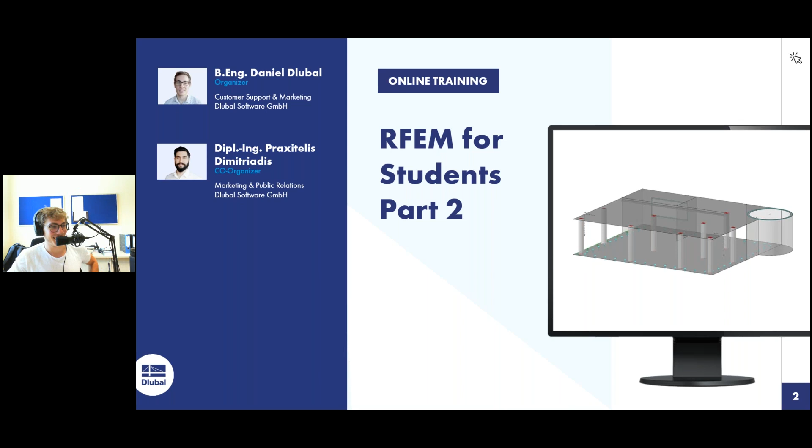Thank you, Praxitelis. Okay, let's go ahead. So for those who are visiting this training for the first time, here are some hints. We are using the webinar platform GoToWebinar. The control panel you see on the right side, there you have several options. First of all, you can show or hide your control panel in order to see more of your window, in order to see more of the training.

Then, of course, here you have the raise hand symbol. So if you have questions or something like that, you can raise up your hand and Praxitelis will answer this question to you. Of course, here also in the question box, enter questions for us, so that we can answer them. And if you don't hear us, here you can adjust your audio settings. And so for those who are attending now, please raise up your hands in order to see if it works. Click this button here. Very fine. Good. So I pull your hands down again.

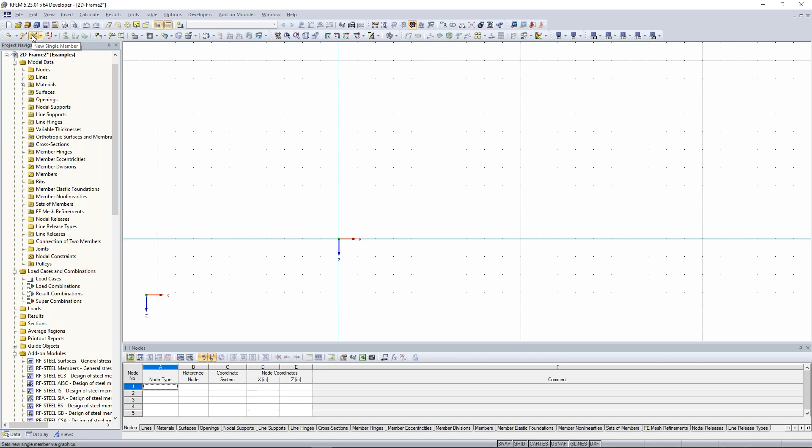First of all, I create my column. In order to create columns, you have to insert members. So I click here in the symbol bar, new single member. And because we haven't created one member yet, we have to create it. So I click here, create new cross section for member start. And it's useful to use this most commonly used cross-section at that window.

And we have to choose HEA profile. So in this case, this one. We click on that and choose here HEA profile 180. We choose the right material. In this case, not S355. We want to have this in 235. So I have to modify this material. I think the best way to do that is modify it, because then we can use it the whole time.

So click here, edit material. Open here the material library. And choose here steel S235. It doesn't have to be at the standard group German. It can also be at the Eurocode. It has the same values, the same material properties. Doesn't make a difference. So choose here steel S235.

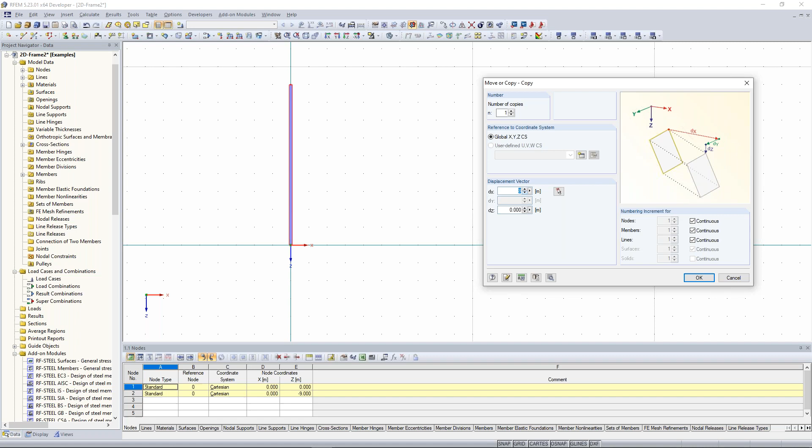So I select this column here, right click, say move and copy, and the number of copies I set to at least one in order to copy that. And my displacement vector is 8 meters. No, sorry, 9 meters. Oh, 8 meters, sorry, now it's right. Okay. Now I have two columns here.

And now the next thing is to create the upper girder, so the roof girder or the roof beam. For that, I choose again new single member. And I create again a new profile, clicking here, create new cross section. And for that, we need an IPE 270 profile. So again, here we have these IPE profiles.

If you don't find the wished profile here, just open the cross-section library, for example here, and RFEM offers you several different cross-sections. And when you want to find the I profile, you click here. So the I sections, rolled, and so on. I can do it this way, but I can also do it the other way. Now I'm here at that window. Go here for IPE, and click here the IPE 270.

If you want to see the different cross-section properties, so the values, click on the info button below, cross-section, and now you see a lot of cross-section properties. Shear area, cross-sectional area, also the moment of inertia, and so on.

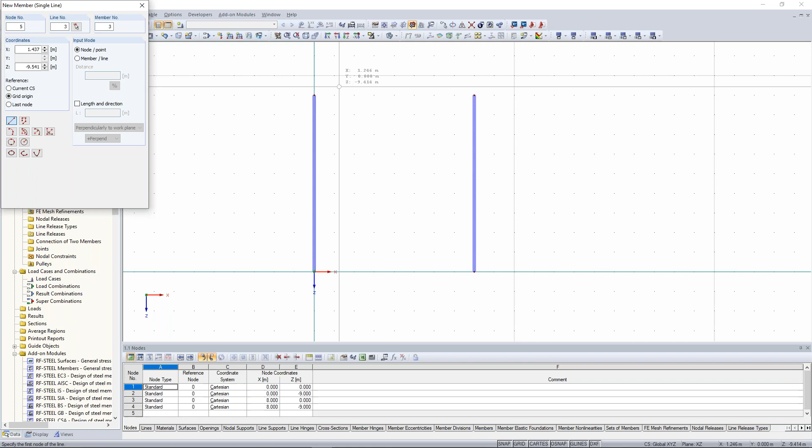I click on OK, again on OK, OK, and I model my girder from the left side to the right side. Good. Now, the next point is creating the slab beam here. We have also a slab beam or slab girder. It has another profile. First of all, I want to create this cross section.

I told you in the first online training that we have also the possibility to create cross-sections, members, model data with the help of the data navigator, but also with the help of the tables. Now I want to create the new cross-section with the help of the data navigator. So first of all, I choose the data navigator, go to the area of cross-section, open this tree there, and with the right click on cross-section, I say, okay, new cross-section, please.

And there I create a new cross-section. In this case, again, an IPE profile, but IPE 360. Okay, click on OK. Click again on OK. And now you see a new cross-section was added to the cross-sections, and it has the color blue.

What does it mean? When you have some model data here which are blue, this means that they aren't used in the model right now. But when we create a new member with that cross section, it will jump to the black color because it is used for that model. Okay, you will see it.

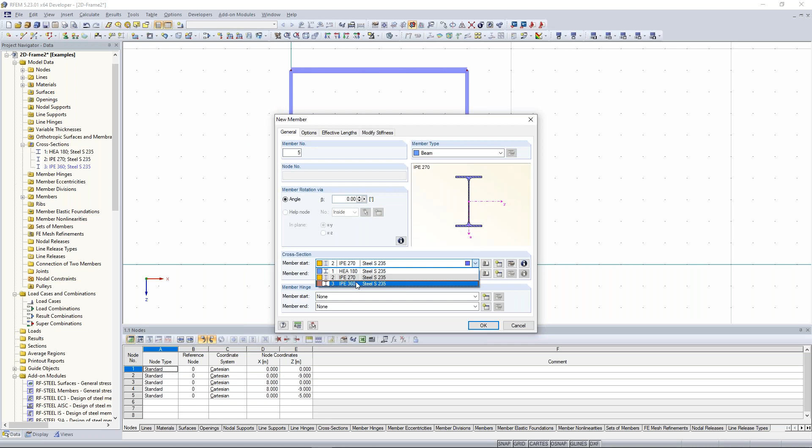Now I can easily create a new single member, again by clicking here at the symbol bar, new single member, and choose now the right cross section I've created before. Click here IPE 360 and create that from that side to the other side. Good.

Now we want to create again here a column. And for that, I divide this member again. Click here, member number 5, and say divide member. But this time, we do it graphically. Big advantage of graphically dividing is that you can divide not just the member we clicked before, but also any other member. Important thing is to choose the right steps, the delta steps.

And now I go to this member here. It refers also to the member orientation. And here it is important that we divide this at the length of 4.5 meters. So close this window. We have here this new created node, and now we have here the same cross-section column. So I click here on that column, and now I want to copy it by drag and drop.

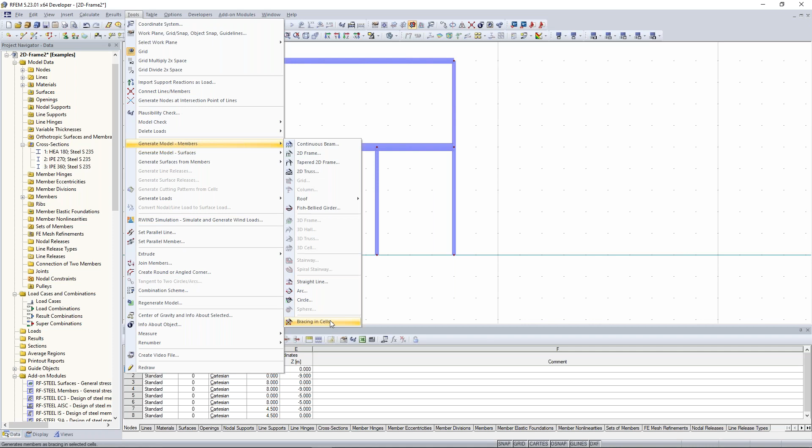We can do the bracings manually, or we use one of the functions of RFEM. You find many functions of creating or modeling something here in the menu bar. Under Tools, you find the function Generate Models, Generate Model Members, and at the bottom, Bracing in Cells. This is very useful for creating some models very fast. In this case, it's not so fast, but I want to show you that because you have also the possibility to create a lot of other things like continuous beams, 2D frames, arcs, circles, and so on. But I decide to create a bracing in cell.

I click on that. And now, first of all, the bracing normally reacts just on tension. So if this member gets tension forces, it will react and transfer the loads. But if the member gets compression forces, it will fail and this member wouldn't be calculated, okay? And wouldn't have any impact on the structure.

So important, choose here the right member type, tension, and now also the right cross section. I create a new cross section. We have a round steel here. Click on that, round steel.

And choose the right diameter, 20 millimeters. Click on OK. Click and again OK, and now we have the right cross section.

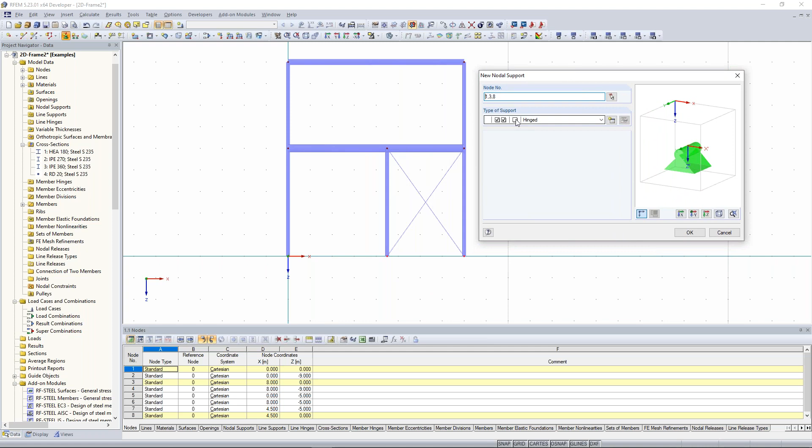Now we have to set our nodal supports. For that, I select these nodes here and say, okay, new nodal support. And because we are here at the 2D system, it's okay when we use here the hinged supports. I click on OK.

And finally, we have to do now our hinges, because here I want a hinged joint, and the same way here also a hinged joint, and that column should be also a hinged column. So I have to create hinges. And for creating hinges, I refer also to my data navigator. So I go here again to the data navigator, right click on member hinges, and say new member hinge.

And now this window opens, and let me explain to you what you have to do there. If you want to create a moment hinge, so no moments will be transferred to the other member, you have to activate here φY, so the hinge. If you want to create shear hinges or normal forces hinges, you have to activate the displacements here, uX and uZ.

So we want to create a moment hinge. We have to activate here φY. You can do it also by clicking one of these shortcuts or icons here, set rotational release MY, and it has the same impact. For that I choose φY, click on OK,

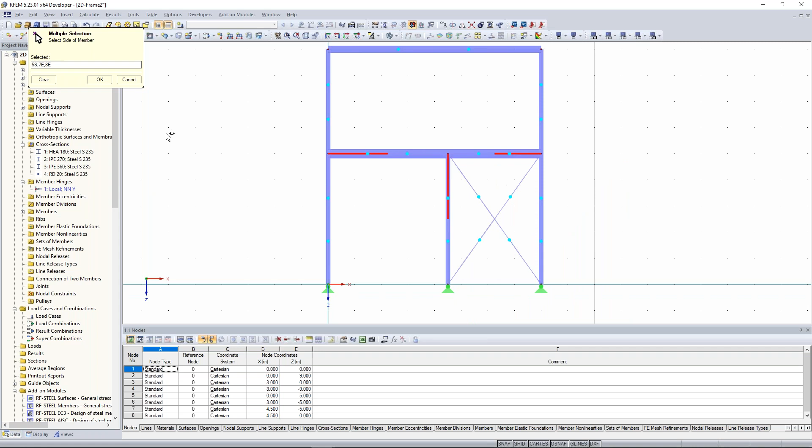So I decide here for the beginning, so this member hinge will be created at the beginning of this member. Here the same, and here I do also the same. I click on OK, and you see here these hinges. These are white points in my case, and these white nodes symbolize a hinge.

Good. Next thing. Daniel, sorry to interrupt. There are many people asking about the bracing, if you could show it again. Of course, no problem.

I create here on the left side on that cell the bracing again. So first of all, go to Tools in the menu bar and say Generate Model Members. And at the bottom you find bracing in cells. And the reason maybe why you couldn't create this is because you didn't set the virtual line here. So you see now where the crosses are. There it's possible to create a bracing.

Good. But here on the left bottom cell, you don't see the cross, and this is also the reason why we couldn't create there a cell. In order to do that, we have to create a virtual line to close this rectangle by members in order to get a cell. I do it now as an example.

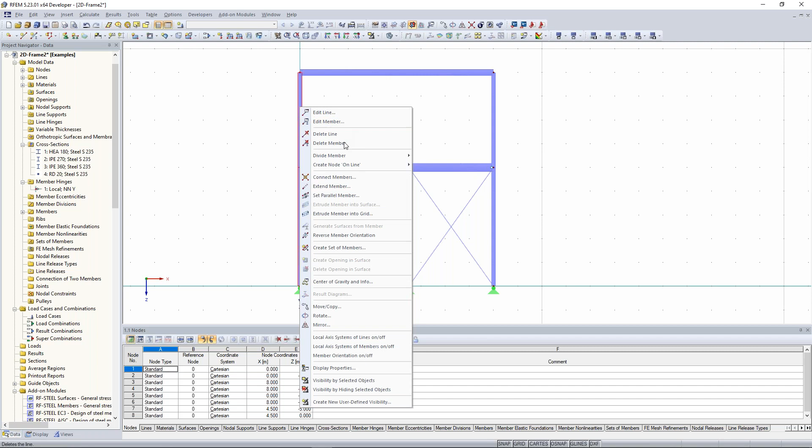And for that, I click on both members, add the upper member to my selection by pressing the Control key. And then with the right click, I can say create set of members. And here I can give it a name. In this case, I say the column should be continuous members. And I click on OK.

And when I change the display model to the wireframe model here in the symbol bar, you see this set of members. This is very helpful for adding loads, for designing, for the interpretation of internal forces. I'll show you the difference: on the right side we still have these two members, and on the left side we have this set of members. I leave it like that because I want to show you the differences.

Okay. So the next point is the loading. We add some loads now. In order to do that, we have to create a load case first. So click on new load case in the symbol bar and enter a name. It's up to you. In my case, I choose self weight. I activate the self weight and click on OK.

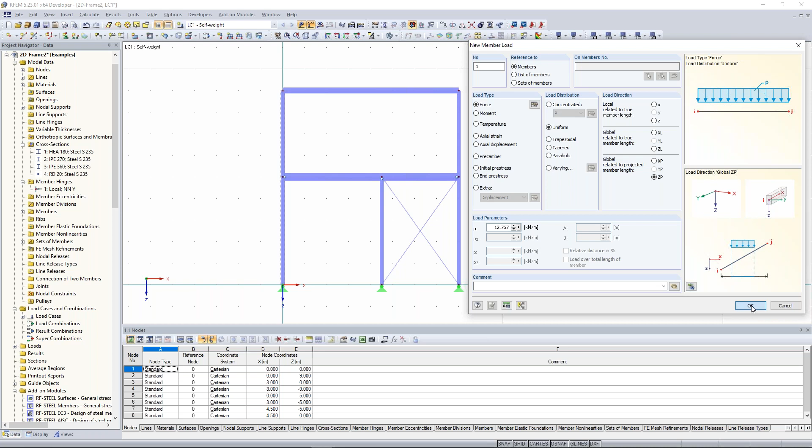I choose this one and enter a value of 12.767 kilonewton per meter. Click on OK, and I choose this girder here. Now I do the same for the slab beam here. Click again on these two members, but they have the wrong value. So what can I do?

I select it like that. And now you see I have selected not only these columns, but also these bracings, nodes, and so on. But that makes no difference because with the right click, I see the different selection options. And this is one big advantage of RFEM, that you can choose model data or load data and edit them. So in this case, I choose member loads, uniform, and say edit.

And I change the load parameter from 12 to 68.371. I click on OK, and you see I just changed this member load and nothing else. Good.

Now I want to add some nodal forces. For that, I select these nodes at the top and say new nodal load. And because we selected these nodes before, you see I have these nodes here. I choose a value of 40 kilonewton in the vertical direction, so I choose PZ, click on OK.

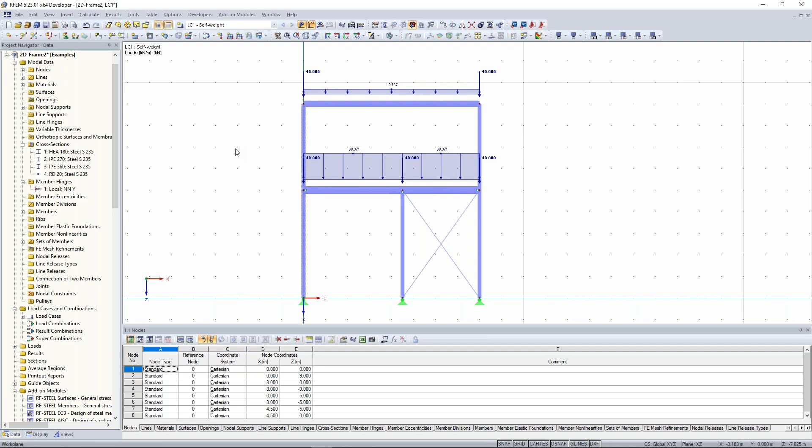And now I can easily copy these nodal forces to the other level. So I click, for example, at that node, and by copying via drag and drop, I can copy it very fast. So there are several options to insert these nodal loads. And now I select that again, right click again, and now not the member loads but nodal loads, because I want to change the value. It's not 40 kilonewton, it's 2.4 kilonewton.

Okay, good. The next thing is the wind load or horizontal load. We created this set of members, so you can understand it as a combined member. And one thing is important: for sets of members, it isn't necessary to have the same cross-section. This set of members can have different cross-sections.

So when I want to create a set of members, it is possible to have a different cross-section here and a different cross-section here. So it's independent of that. Okay. Now see the difference. I create a new member load here again.

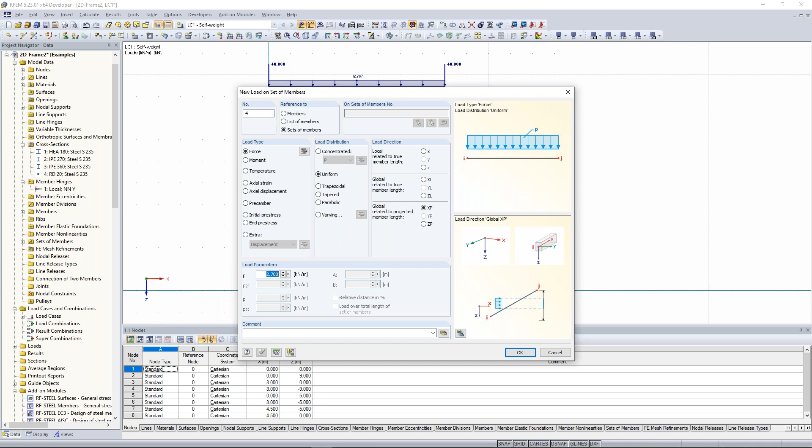And now we can also see the interpretation of internal forces or the view of internal forces. Okay, now we added everything and we can calculate it. So you can click here, calculate all, or click here, show results.

And first of all, we see here the deformation. If we want to display the deformation in a nicer way, go here to the display navigator, go down to the results, and to the area of deformation, members, and choose that the cross section should have a colored deformation, and you see it like here. You can deactivate maybe also the isobands, the separation lines, and now it would look a little bit nicer. Yeah, this is one tip.

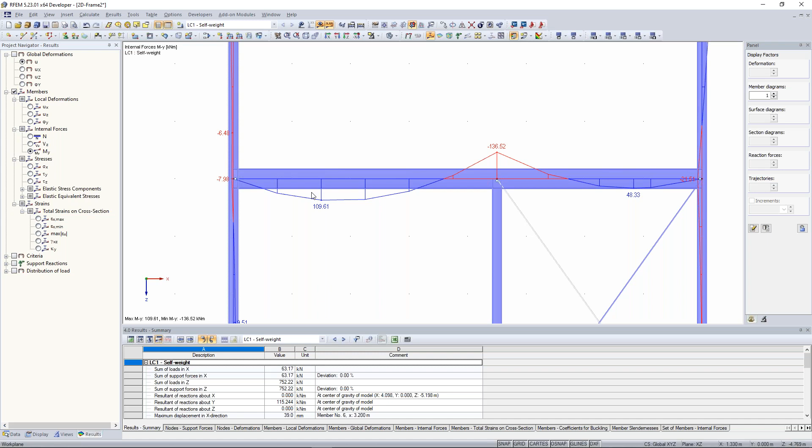One of my secrets in order to show that a little bit nicer. And then let's go to the internal forces. So for that, we have to activate the members here. What I want to show you is, first of all, the bending moments. I think that's pretty clear because there we have a hinged joint, so there shouldn't be any bending moment. When we look to the normal forces, I think that's also pretty clear in the columns that we have some normal forces.

And now look to the bracing here. Why don't we see any normal force at this bracing, at this member? Because when we look back to the deformation, we see this deformation is set to the global X direction, so we have horizontal deformation. This bracing, this member becomes longer, so I think it's pretty clear that this will get tension forces, and this member will get compression forces because it becomes shorter. And when a tension member gets compression forces, it fails and will not be considered in the calculation. That's also the reason why there isn't any value of internal forces.

And here we see, okay, this bracing or this member has positive values - positive normal forces are tension forces. I think that should be clear now.

Okay, now again, one important point is the connections of the member type. So I double click on one of the members, we have here different member types. This member type beam is the standard member type for creating these structures. This is a type where you can transfer all internal forces - so you have normal forces, shear forces, and also bending moments. So it's a bending resistant beam.

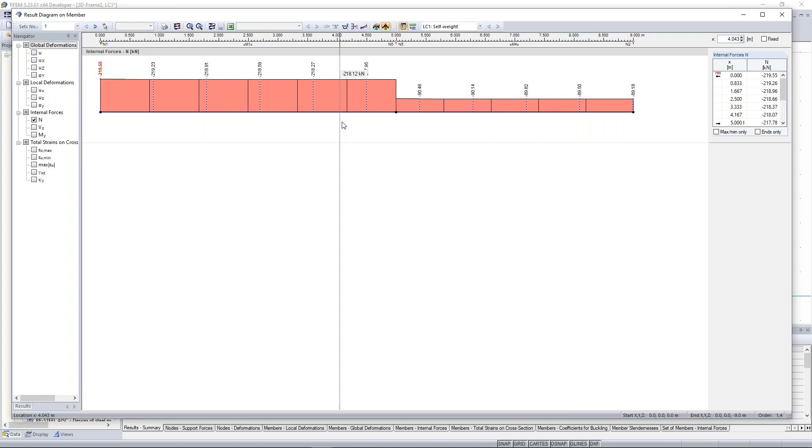I click here with the right click and say, okay, result diagram. And I see it here at a separate window, the whole internal forces, also the distribution of these forces, also the deformations. I can activate it here. This is very helpful when I want the same on the right side of my structure - I have to click every single member, right click and say result diagram. Now I have the same effect, but I have to click every single member in order to get the same situation as on the left side, where I just clicked this set of members and said result diagram.

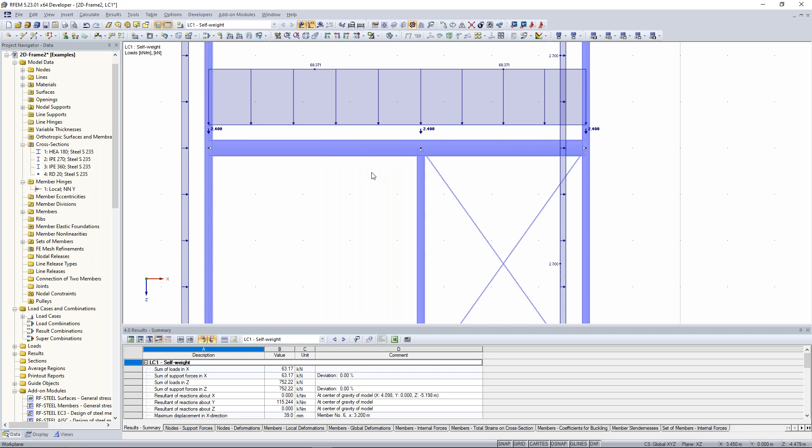A truss can have bending moments along his member, but only at the end there are no bending moments. So when you look - I create here a rigid joint, so I delete this member end, but I create here a single beam with hinged joints. So in order to create that, I create here at the member end again a hinge, and now it's a single beam. You have no bending moments there.

You will see it now, just for this member. Look to the bending moments, and I think that field moment is very clear. At both ends we have hinges, and that's also the reason why we get no bending, no negative bending moments there. The same situation you can create also with the member type truss - with the member type truss, the adding of member hinges is blocked, because at both ends you have hinges. Now look to the internal forces of the bending moments - same situation, same effect, I think that's also clear.

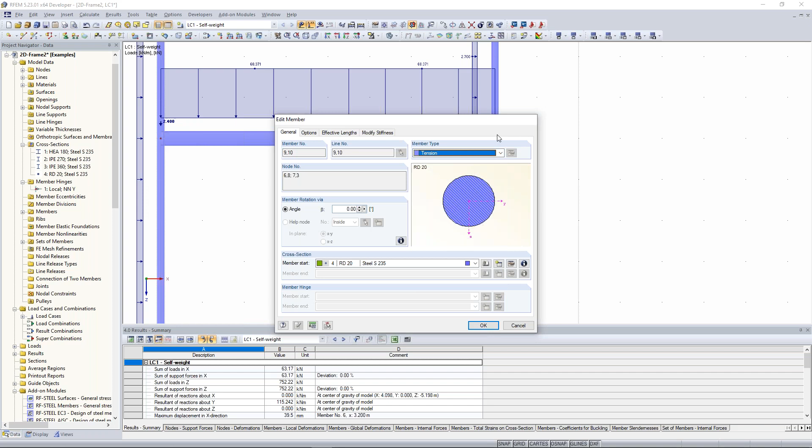And now I want to show you with the truss. So for that, I choose these two bracings, say edit, and truss only normal forces. Now I think the better way to show you is when I activate this at the columns. So look to the bending moments - when you look to the columns, you see there are some bending moments. And when you don't want to have that, when you want to just transfer normal forces, click on that member, on that column, and create truss only normal forces. So the program will calculate that column so it gets just normal forces. But these forces can be positive and negative - so you can get compression or tension forces, but nothing else - just normal forces, positive or negative.

I calculate it, and you see no bending moments. At the calculation before we had some bending moments, but now there are no bending moments, just or only normal forces. And this is the difference concerning these member types.

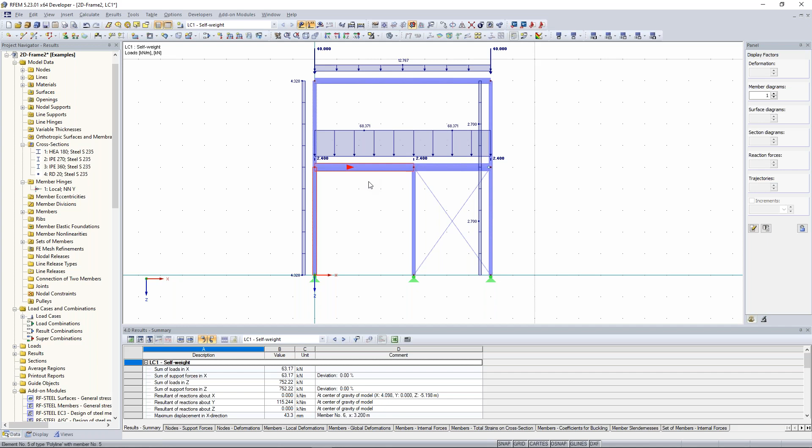So this is the next thing, doing that, making a buckling analysis. For that, I change these again to a normal beam here - change this beam again to the beam, and the member start a hinge. Okay, now we have the situation before, and now we can do the buckling analysis.

So for that, I click here at RF Stability. I consider 4 eigenvalues, so 4 buckling cases. I refer to my self-weight load case. I just have to activate my division for straight members at least at 10 - the minimum number of member division should be 10. It's up to you, but more than 2 definitely. And the other settings you can leave like that. Calculate it.

And now you see the critical load factors - the factor where you have to multiply the whole forces, the whole loading, in order to get an instability. But we want to show the eigenvectors, and here we see it.

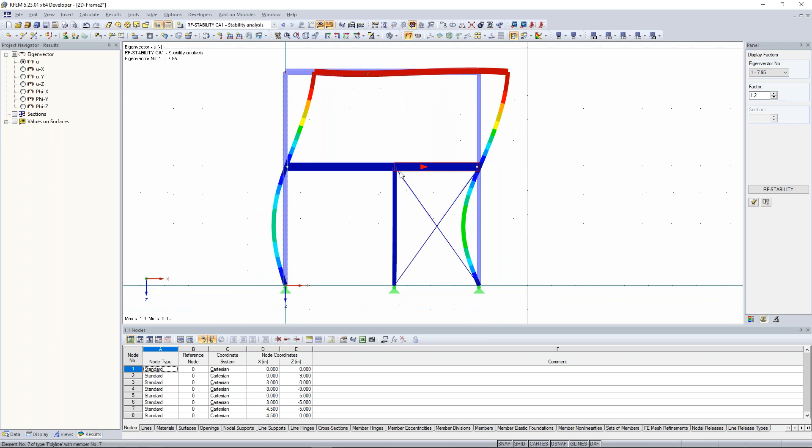Normally there should be - the first eigenvector should be there, but I can say why this eigenvector is like that: because there isn't a column. This is a rigid joint here because we have no hinge here. I change this now, I make here a hinge, and now keep that eigenvector as first buckling case in mind. I create here, wait a moment, here a hinge, and calculate everything again.

And now it's better. So the first buckling case here is this column, and we have the second Euler case. This is a local buckling case or local failing, because this column will fail at the eigenvector, or critical load factor of 5.81. Then the second will be a global failing.

And to look at the buckling lengths, critical lengths, or effective lengths, click here. And here you see the critical lengths of this.

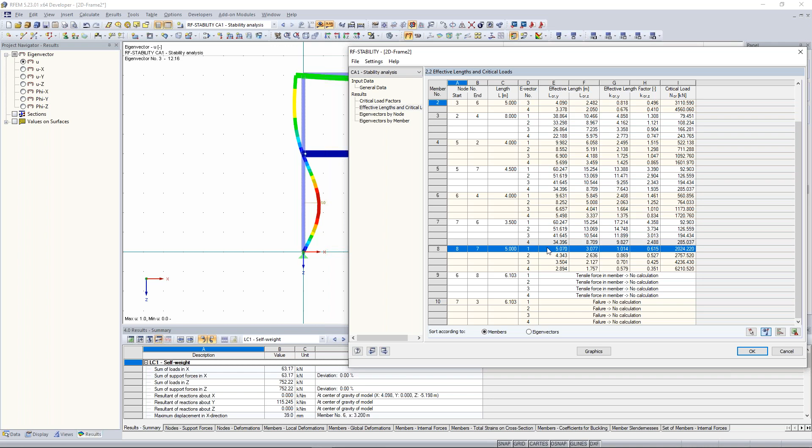When we look to member number 8, there we should have a member length of the same length as this one. Look here, member number 8. We have here for the first eigenvector the effective length factor 1, and this is also similar to Euler case 2. This factor multiplies by the normal length here, and we get a value of 5.07 meters. This is the effective length, so the buckling length.

Okay, good. Next question.

Is there a way to determine what is the right cross-section of a member through the RFEM software? How you can choose sizes, etc.? So as far as I understand this question, I think you want to prove if this cross section is enough for the whole loading.

In order to do that, you have to do some designs, and we can do a simple design, for example. So look, now we make a very easy design. We make a stress design here at that beam. So look at the results, look at the bending moments. We have here these normal forces, this bending moment, and so on. So now look to that, we make a very easy design.

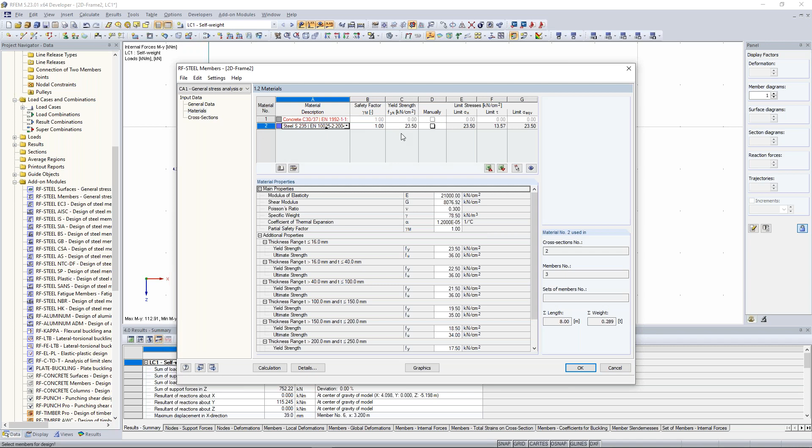But for that, I make a very linear elastic proof. So I go here, RF Steel Members. This is a general stress analysis of steel members. I refer to that member here. Click on OK, choose this load case here. Now I can check the right material and the cross section.

Here you have the possibility, after the calculation, to also optimize the cross section. I have here this cross section IPE 270. I calculate it, and you will see the stress ratio is okay. We have a value of 0.64, and that's okay. So I can go back, the maximum design ratio is 0.64, and I can optimize it.

The cross section will be optimized, therefore the optimal section from the table will be used. So we can get a smaller IPE profile. Click on calculation again. Now we have another stress ratio, much higher than before, because it refers to the optimized cross section, and in this case it's the IPE 240 profile. This is maybe a way to optimize or to get the right cross section for that case.

Another question, maybe the last question of this chapter: What are null members? Null elements, sorry, null elements.

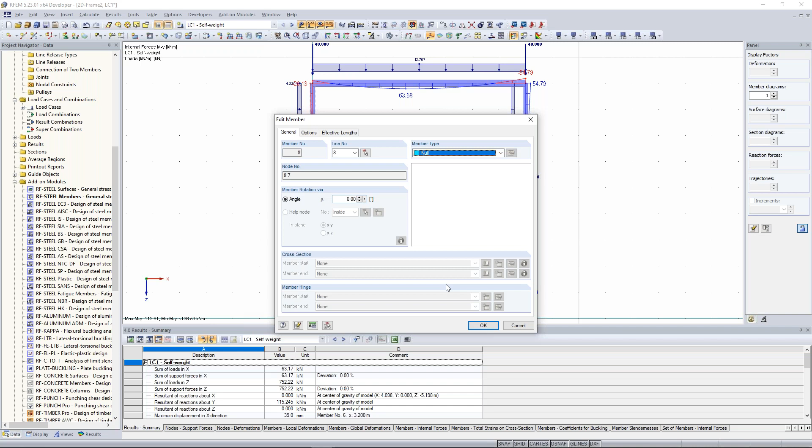These null elements are members without any rigidity, so without any stiffness. It's just for when you want to model something in an easier way, and you don't want to consider some calculation, and when you don't want to have any impact on the calculation, you can use these members.

So for example, I can create here this null type here. This beam will look like that. And then I would, for example, have a closed cell. This is maybe one option. Or when you want to add a surface load or members and want to cover the whole rectangle, you can use these null members.

So the null members are maybe one way to model something, but you don't want to have any impact on the structure. These member types don't have any stiffness and so on, just for easier modeling.

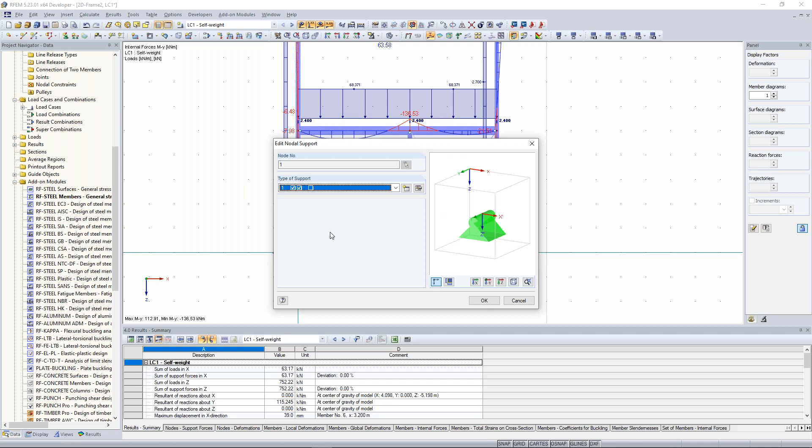So I click here on one of these supports. When I edit this type of nodal support, you see here some displacements and rotations. So here the supports and the restraints are grayed out, and that's because we are using this 2D system, where some deformations and rotations are partially blocked. Good. So the last question of this chapter is this one.

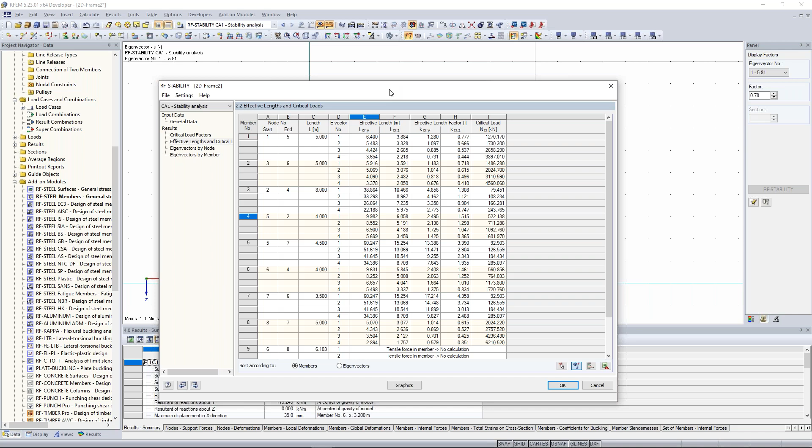Sorry, not 10 meters, because you also have to refer to the right eigenvalue, eigenvector, and this is the second form, and for that you would have to use the second form here. So member 4, eigenvector number 2, and there you would have this effective length of 8.5 meters.

And is the effective length not the same as the buckling length? Okay, sorry. Yes, of course. The buckling length is the same as the effective length. There are several expressions for that. The effective length is the same as the buckling length.

Okay, good. Now we jump to our next project. For that, we create again a new model. Enter the name concrete model and refer to a 3D model. I choose the right project name and save it to the right folder. It's up to you where you save it.

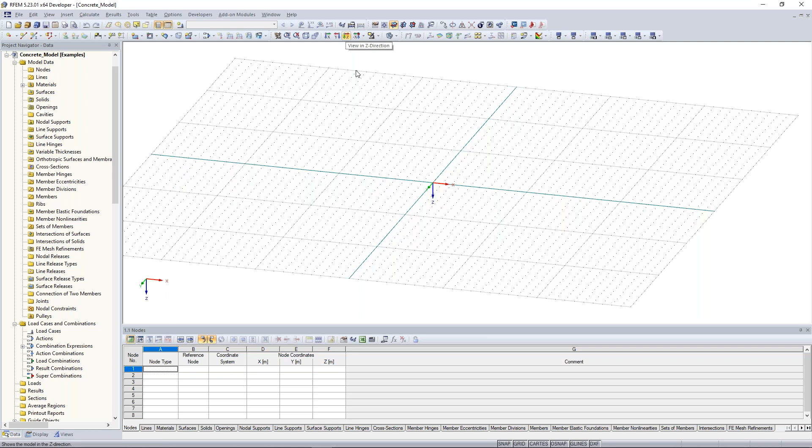In order to insert the nodes very easily, I would recommend you now to use the tables, okay? So I jump back to the view in Z direction in order to have my work window like that.

And now I insert several nodes via the tables. It's very easy when you have the coordinates in order to do that. So just click here at nodes, click on one cell, refer to the origin point, then jump from one cell to the other cell with the help of the tab key on your keyboard and enter here for X for the first node 0, 0, 0.

And then just click enter and it will jump to the next row in order to create the next node. For that we create 14, 0, 0. Next node will be 0, minus 12, 0. And the other node will be 14, minus 12, 0. Okay, good. Now we have these 4 nodes. And with the help of the 4 nodes, we can easily create one rectangular surface.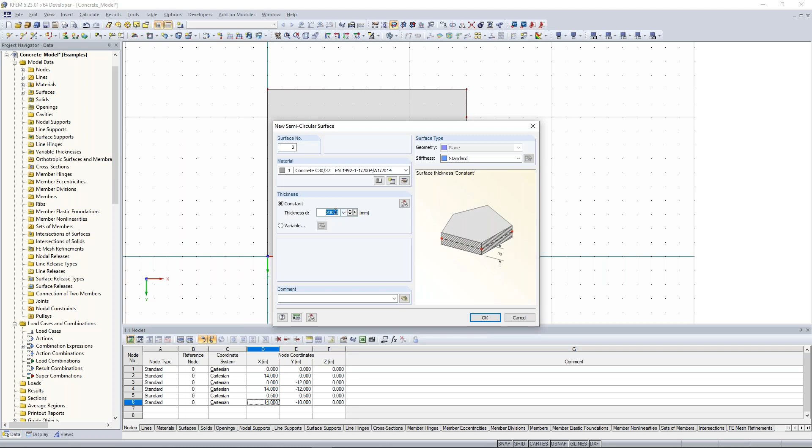Good. Now the next step is that we create this semicircular surface. For that, go to the new rectangular surface, click on the arrow, then you have a choice of several forms of surfaces. Here, choose semicircle. Choose also the right thickness, click on OK, click on the radius, and go 2 meters down. And voila, we have this semicircular surface.

Okay, good. For the next things, we have to copy this node several times along this axis and also copy it a little bit upwards. So click on that node, right click on move and copy. And say here, number of copies should be 2 with a displacement vector of 5. Click on OK.

And the last node I want to copy again, but in this case only once with the displacement vector of 3. Okay, good. Now I want to copy these nodes again against the global Y direction. So I select every node. Important that you draw your selection window from the left to the right lower corner.

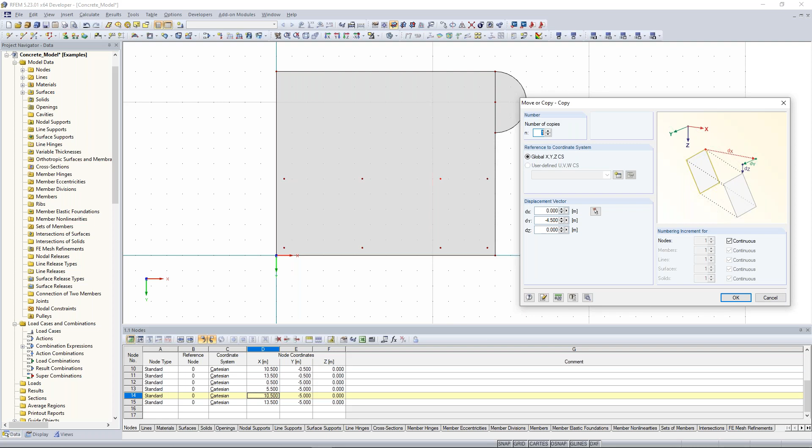Now we want to copy everything to the next level. So we draw a selection window over the whole structure. Right click, say move and copy. Now number of copies should be 1. And now against the positive Z direction, because we want to copy it to the next level, click here, enter here the value of minus 3.25 meters.

Keep in mind that creating the opening over two surfaces is not possible. You can just create openings in one surface. For that, we have to delete these two surfaces. So click here on that line, click delete on your keyboard, or right click delete line, and the whole surface disappears.

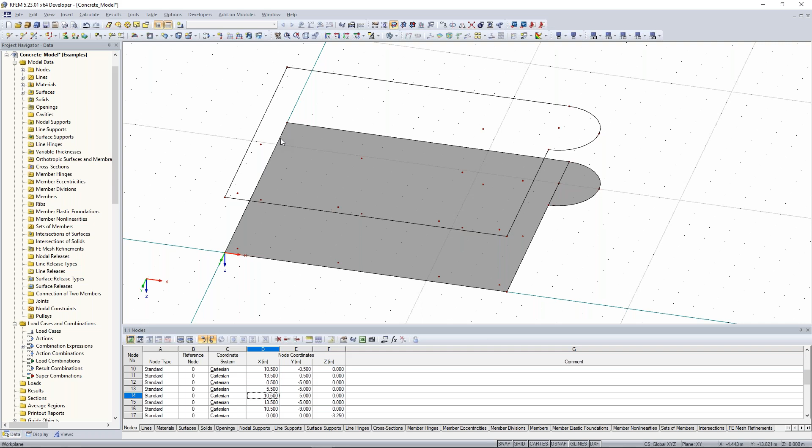But in order to create now one surface at once, we have the possibility again to create a surface with the help of the boundary lines. Select boundary lines. Now set the thickness to 300 millimeters and click on one of these lines, and the concrete slab is generated.

Okay, good. Now we can create this opening very easily. Next to the creation or inserting of surfaces, you find the openings. Click here also with the help of the arrow to circle, and click here to the middle point and enter there a value of the radius of 1.8 meters. Click on apply, and then you have this opening here. Okay, good.

The next step is creating the walls. The walls are also surfaces, and you can create in RFEM a surface when you have at least three boundary lines. So how can I do that? For that, I want to create here some walls, and also here the semicircular surface. I need additional nodes and additional lines. So how can I do that?

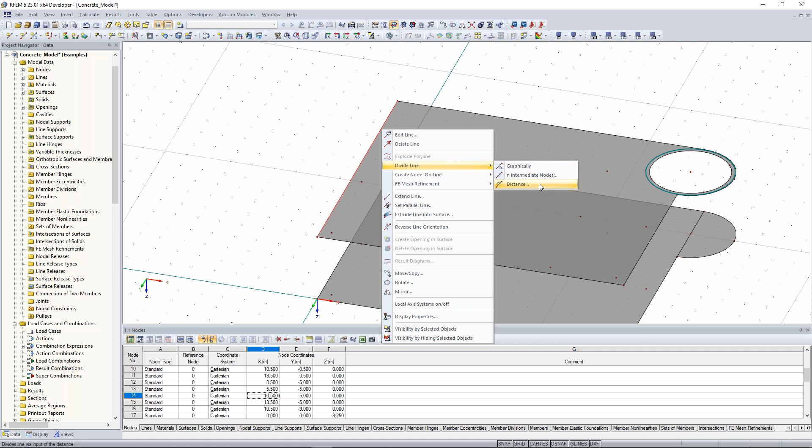First of all, I divide my lines in order to get new nodes. And with the new created nodes, I can create new lines. So I click on this line on the left side, make a right click and say divide line, in this case by distance. And now I look to my line orientation. In this case, it shows me from the top to the bottom. So I want to have it at the length of 3.5 meters. So the line start should be 3.5 meters. I click on OK.

And this node was generated. And the same thing I do also for the other lines here. I click here on that line, right click on divide line, say also by distance. And now I refer to the line end, and here I enter the value of 5.5. Click on OK. And the same thing again with this line here. Right click, divide line, distance. Line end is 3.5 meters.

Okay, good. And lastly, this line here. Right click, divide line by distance. And here I divide the line at the end, 2 meters. Okay, good. Now I create new lines. For that, I create here a new line at the symbol bar and draw this line from the upper corner node to the lower corner node. Okay, now I have this line.

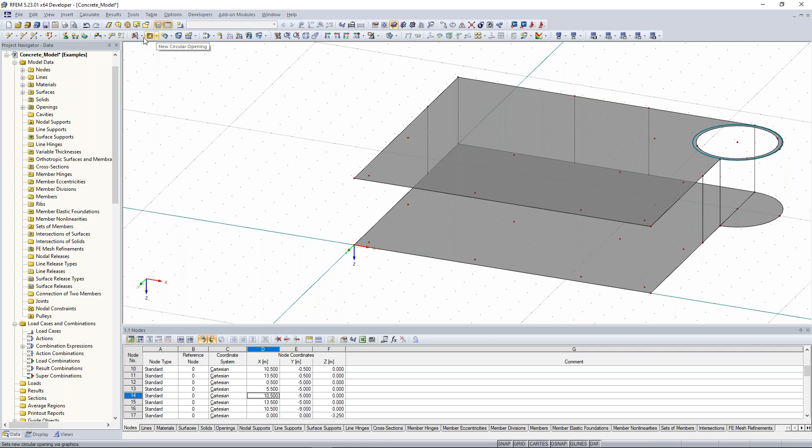Now I can create the walls. To do that, go here to the creation of rectangles, select boundary lines, enter there a value for the walls of 200 millimeters, and click these boundary lines. I think that's pretty clear. The reason why I don't do any wall there is that at curved lines, plane surfaces aren't possible to create. So for that, you have to use another way to create a surface, because what we were doing until now was creating plane surfaces.

But now you see here, we have a semicircular surface, a curved line. For that, we have to use something different. We have to use quadrangle. You find it here in the symbol bar, quadrangle, and that's a general four-sided surface. Click on that. Also decide here for the thickness of 200 millimeters and click these boundary lines. Okay, good.

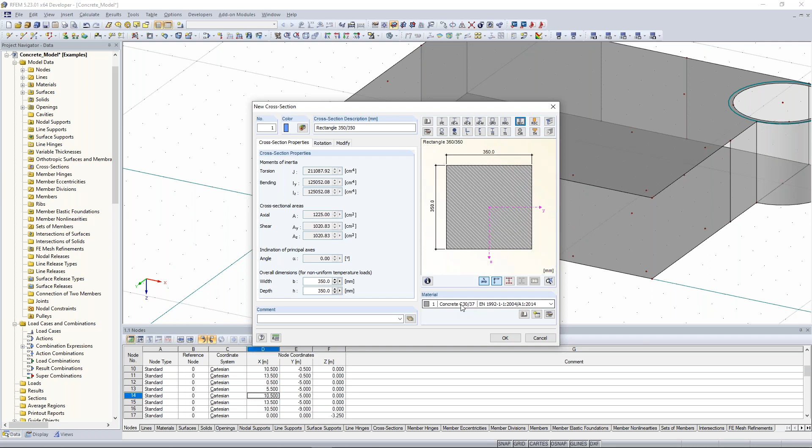Finally, the last step for that chapter is creating our columns. For that, I create here a new single member. So in RFEM, in order to create girders, beams, trusses, and also columns, you have to create members. So click here on create new cross-section for member start. Decide here for this rectangle concrete cross-section, and we have a square cross-section of 350 by 350 millimeters. Click on OK. And because we were referring to this concrete cross-section, the material was also set to concrete C30/37. Click on OK. Again on OK.

And draw this member from the lower node to the upper node. And with the right click, close this insert window. Because now I want to show you again something very nice: the copy function via drag and drop. Select this member here, press the Control key and move it from one node to the other node. I think that's pretty clear. And now rotate your window so that you can select all 4 columns by drawing the selection window from the right to the left side.

And now all columns were selected. And now press the Control key again, and you can copy it easily to the next node, to the next plane here. And then this node here, we want to create there again a column, create this here.

Okay, now I have missed something. I have to add there an additional wall. So for that, I select this outer surface here, this outer wall. Again, press the Control key and copy it from there to there. Okay, good. I think we finished this chapter.

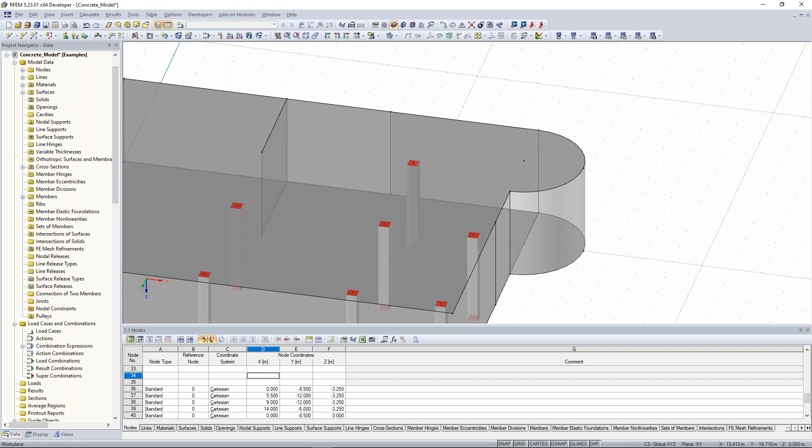Now go to the symbol bar, click here on New Circular Opening. You find it here when you click on the arrow. Click here, Circle, and click here on the middle point. And now you have the possibility to do it graphically, but because you are working with the wrong work plane, it will not be so easy to do that. So just enter the value of 1.8 meters, press Enter, and the opening was created.

Yeah? Okay, next question maybe. Okay, I think that was everything. You can carry on. That was everything? Okay. Yeah. We will have time at the end to answer maybe questions.

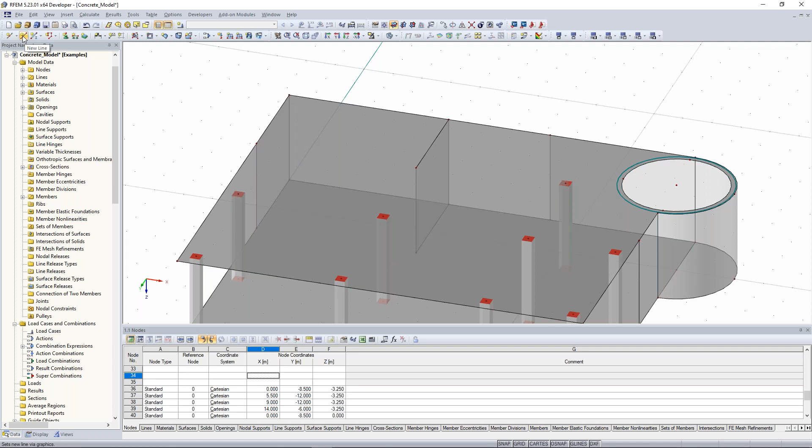So for that, we create here a new line in order to create our downstand beam. So I click here on New Line, click from that node to that node and again to the column here. And now maybe you see this isn't a straight line. You see it here. And this is a mistake. I want to have here a straight line. So I can select everything on that node and move it to the same level here.

In order to do that, please press the Alt key on your keyboard, because when you want to select this within this surface here, it would not be possible because you would select also the surface. For that, please press the Alt key and draw a selection window from the left to the right side. Now when you rotate the whole thing, you see I selected the column, the member, and also the nodes.

And then say Move and Copy. And now say select 2 points and return the displacement vector. Click on that node and on that node. And you see, we have a displacement vector of -5 in delta x and then also in delta y. But delta x we don't want to have, just delta y. Click on OK.

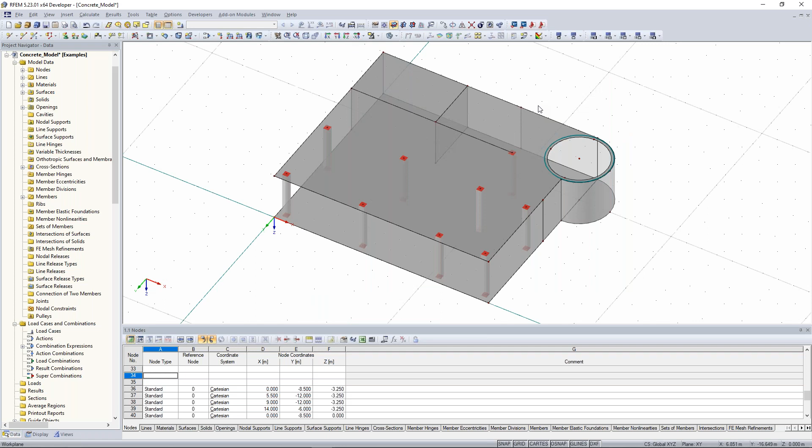Next thing is to create the downstand beam. For that, please select this line, add to your selection also the next line with the help of the pressed Control key. Right click, say Edit Line. You see now here the line numbers we selected. Go to the Member tab and say member should be available. Now we create a new cross section, the cross section of the downstand beam.

Click here on rectangle. And we have a width of 200 millimeters and a height of 150 millimeters. Click on OK. Yeah, looks like that. Click on OK.

And now I think one of the most important things is when creating downstand beams or T-beams, please, really, please use the member type rib. Okay? So if you learned something from this training, and at least it should be just one thing you learned at this training, then it should be that you use for downstand beams the member type rib. Okay? Go there, edit this member type,

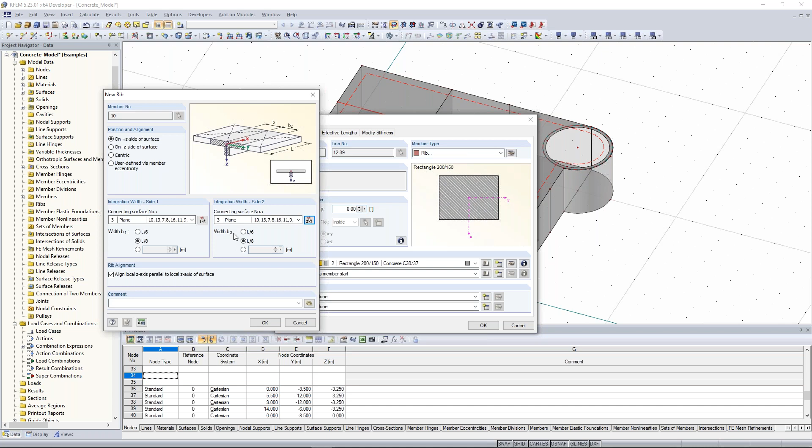I click on OK, again on OK. And now you see here this downstand beam. And you see, there's an eccentricity, there's a joint, and you don't have to do that. I just want to show you that when I go to the display navigator, go to the rendering, click here on model, solid model, surfaces, and say filled, including edges.

You see it here. So the lower edge of the surface equals the upper edge of this downstand beam. So everything is right. It's also realistic. And this is one important thing to know when you create downstand beams.

Next thing is the creation of an opening in another work plane. I want to create an opening in this surface, this wall, because we want to create a window. You have to change your work plane, because now it isn't so easy to create an opening there, because you don't have the right work plane you can refer to, so you have to change your origin.

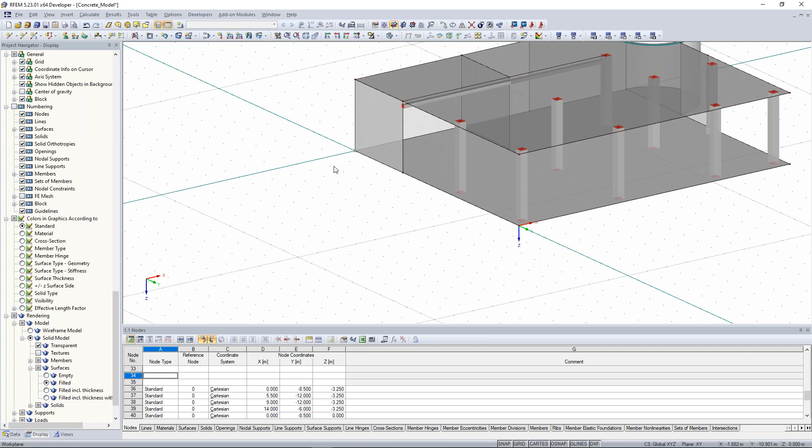So in order to do that, click here on set origin of grid work plane, click on that, and choose this corner node here, because then we are in the right work plane. We can change the work plane to XZ, so go here and say work plane XZ, and now it's easier to create a window or an opening there.

Okay, so for that, you can refer here to rectangle, and now it's easier to create different openings there. But you see the snapping points, the grid points aren't so easy to snap, and they are not at the right coordinates. So for that, I create my nodes. So I go here, click on data, click here on nodes, say create new node.

And now it's important that I refer to that point. Sorry, this was the wrong insert of nodes. I think the best way to do that is go here to the symbol bar, click on new node, and there refer to the Cartesian coordinate system.

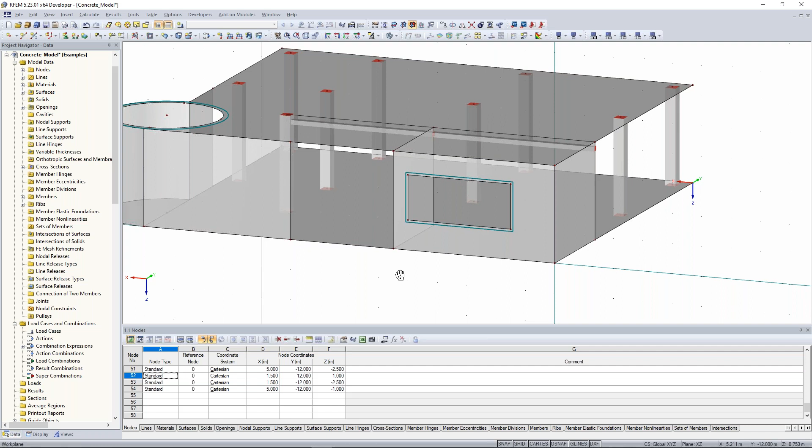And now you can easily create this opening. Click here on new rectangular opening. Click on those two nodes and you can easily create your window or your opening. This is one point you have to keep in mind. When you want to modify, edit, change, or create something on another plane, you have to change your origin of grid and work plane. Good. I change it back to my beginning situation.

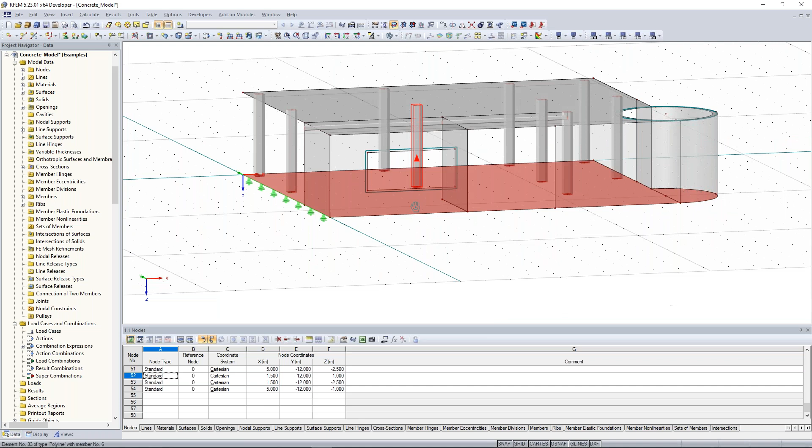And now the surface supports. For that, I rotate my window a little bit in order to select these surfaces here. I click on that surface, press the Control key and add to my selection this surface. Now, with the right click on that surface, I can say edit surface, go to the tab support and eccentricity, and say the support should be available.

And there we change, first of all, the units and decimal places, because we are referring to meganewton per meter to the power of 3. So click here on units and decimal places and enter there at support stiffness orthotropy the forces meganewton. Click on OK, these units will change.

And now it's easier to enter the values, not so big. So there are these kind of spring constants: 10, 10, 100. And for the shear, we have 50 and 50.

We want to consider one nonlinearity. In this case, the whole surfaces should fail if the contact stress in the Z direction is negative, so if it gets tension forces, no tension forces. So this option corresponds to failure under tension. This is right, so if the slab is lifting, no more support is provided. This option here.

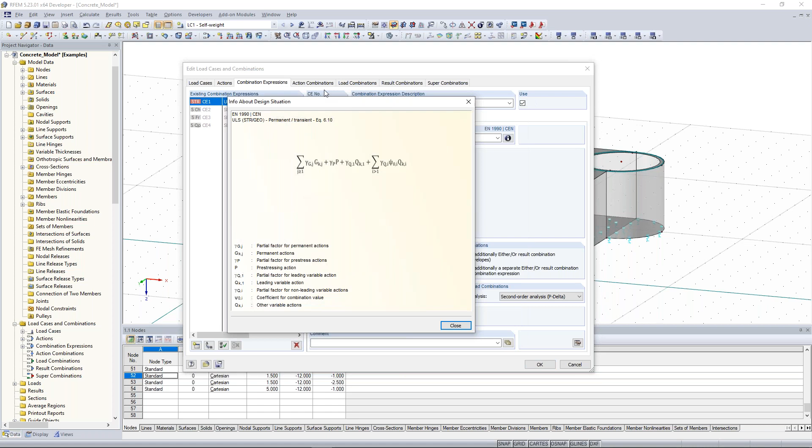So when I jump back to this ultimate limit state, I can see here the design situation. When I click on the info button, I see the design situation and how load cases will be combined. Here, first of all, these partial factors, then again some partial factors. And when I have more than 2 load cases with different actings, I also have to consider this combination factor, the coefficient for combination value. This psi and this gamma here - the gamma is the partial factor, and this psi is the coefficient for combination value. Okay, I close this window.

What I want to consider is the imperfection load cases. I have these imperfection load cases, and I want just that they combine with the right wind load cases. For that, I say all imperfection load cases are alternative, so no imperfection would combine with each other - they exclude each other - but I subject them to specific load cases. I don't want the imperfection towards the positive x direction to be combined with the wind in the positive y direction, because this would be a little bit favorable for the whole calculation. I know the most unfavorable situation will be if the imperfection towards the positive x direction is combined also with the wind in the positive x direction. So I exclude them. The same I do for the positive y direction when I have the load case imperfection towards positive x.

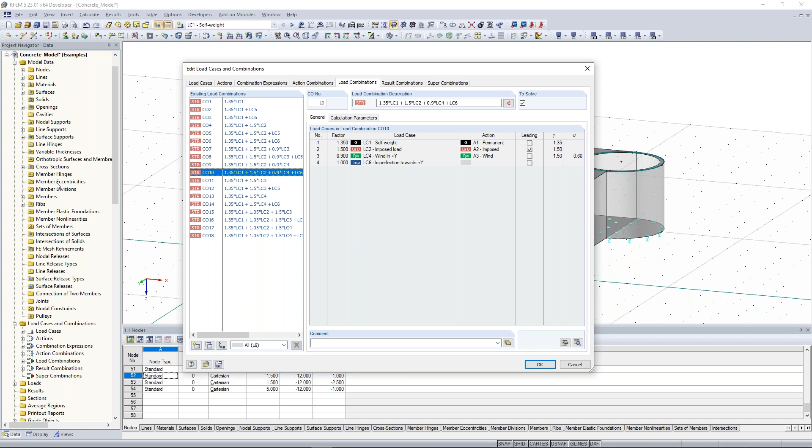Now I jump to the load combination. What is a load combination? A load combination is a combination of all load cases, taking into consideration these partial factors and combination factors, and we combine these load cases into one bigger load case. When we jump to load combination 10, we see we have load case 1, load case 2, load case 4, and also load case 6, and here also the different partial factors and combination factors.

Okay, then I jump to the result combinations. What is the difference between load combinations and result combinations? The result combination is a combination of all results as an enveloping result, so you can see the maximum and minimum of internal forces or general results. In a result combination, the maximum and minimum values of internal forces, deformation, support reactions, and so on are determined. This is one big advantage because you have 18 different load combinations and want to see the most unfavorable results. Result combinations are very useful because they consider all load combinations and all results - so all results of the load combinations in that case - and there you can see the maximum and minimum of the results. Okay, good, so much to load cases, load combinations, and result combinations.

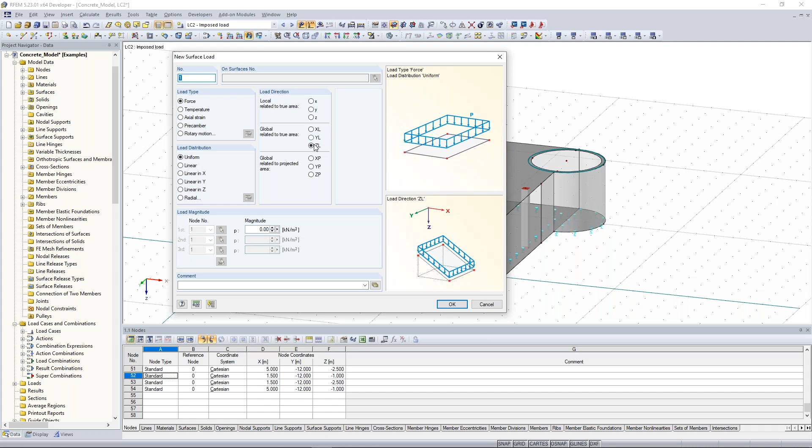So let's begin with load case 2, imposed loads. I go here, create new surface load, refer to the true area, and set the magnitude of the surface at the bottom to 5 kilonewton per square meter. I click OK.

I made a mistake, unfortunately. I click this surface here, rotate my work window a little bit to click on that surface, and do the same for the upper surface, but here I have to change the value from 5 to 2 kilonewton per square meter.

Good, now I jump to the next load case, load case 3, wind in positive X direction. I choose this wall, click on new surface load, refer to global related to true area, and enter a value of 0.4 kilonewton per square meter for the pressure side.

Now, an important thing: I use line loads because I refer to the edges or boundary lines of surfaces. So I click here, select these two lines, click on new line load, refer to the right direction, in this case X direction, and enter the value of 0.65 kilonewton per meter. Click OK.

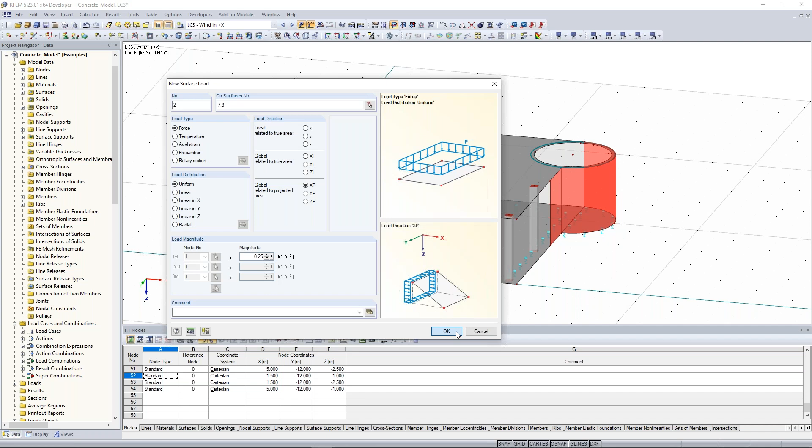We do the same for the right side. I choose again these two surfaces, click on new surface load, and relate to my projected area. For the suction side we have a lower value, 0.25. I click these two lines, create a line load, and enter a value of 0.41.

Now I jump to the next load case, the positive Y direction. I select all three surfaces here, click new surface load, relate to the projected area, and for the pressure side we have a value of 0.4 kilonewton per square meter. Now I refer to these lines here, new line load, and also here 0.65 kilonewton per meter. So now I made a mistake.

The direction of the wind load is wrong. I click again on these two line loads, right click, edit line load, and of course the direction of these line loads was wrong. I refer to that one, related to true line length in the Y direction. Now it's right. So you see, it's no problem when you make mistakes in the modeling or load entering - you can change it every time afterwards.

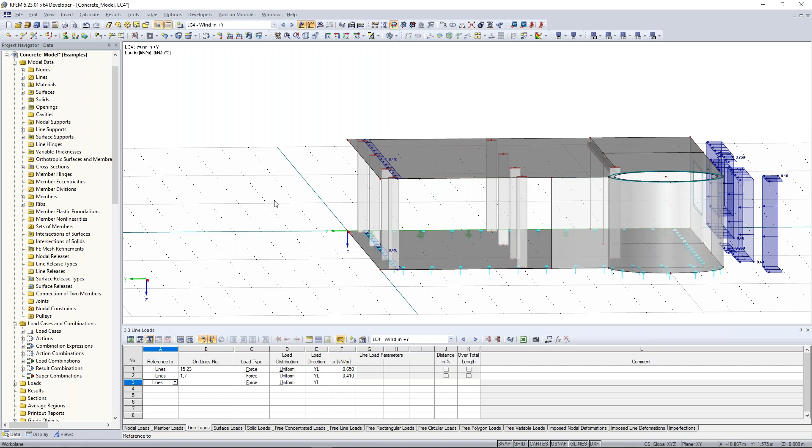Very easy, good. Now, the next thing: inserting imperfections. First, I refer to my imperfection towards the positive X direction. In order to filter something, I can really recommend working with the Views Navigator. Click here to the Views Navigator, and now you just want to see all columns.

You can select every column, and then say show me the visibility, show me these objects, show me the visibility by selected objects. This is one possibility, but there's an option to do it much faster. Go there, visibilities, activate members by cross-section, and activate just the rectangle 350. Now you see everything is shown by this visibility of these rectangles, so now you can easily select these columns.

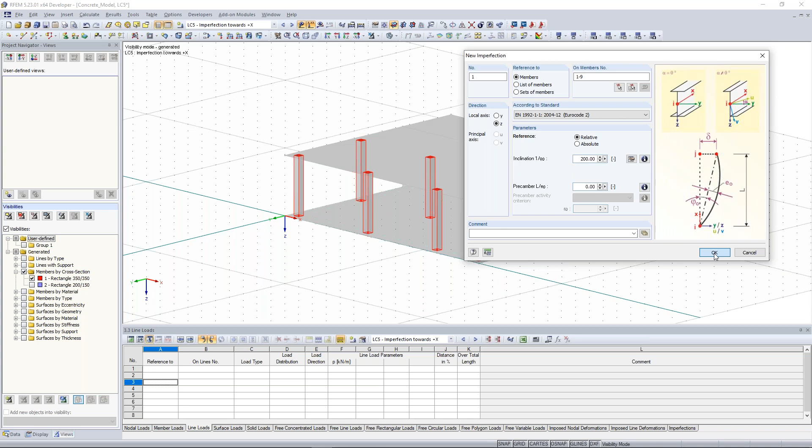I refer to my local axis in Z direction. Now you have to trust me because I know that the local axis is set right. Click on OK. You can activate the local axis of members by right-clicking on one of the members and selecting local axis. And now you see also the imperfection. I changed the display model to wireframe, and you see the imperfections a little bit better.

Okay, good. And we do the same thing also for load case 6, the imperfection in Y. Again, we select everything, click on Insert, Loads, Imperfections graphically. But in that case, the direction should be the Y direction. Click on OK, and we have this imperfection. Okay, good.

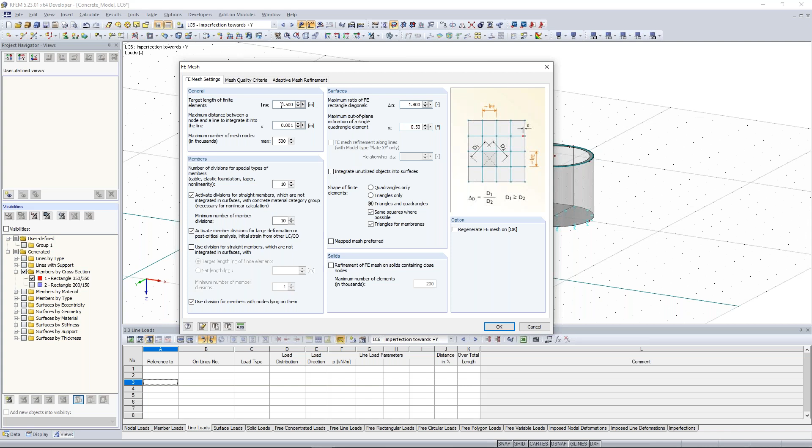Now almost everything is done. Let's look a little bit at the FE mesh. We learned in the first online training that we have in the menu bar the possibility to do FE mesh settings. Click on that. Here we see the general target length of finite elements. It's okay when you use 0.5 meters. You have to adapt this length of finite elements every time to your whole model.

When you're designing joints, for example, with the help of FEM and FE elements, you have to adapt the target length of finite elements and maybe choose a lower value, so a finer mesh. It's up to you how to use that. I can really recommend leaving it like that, because the presettings are really good. Click on OK.

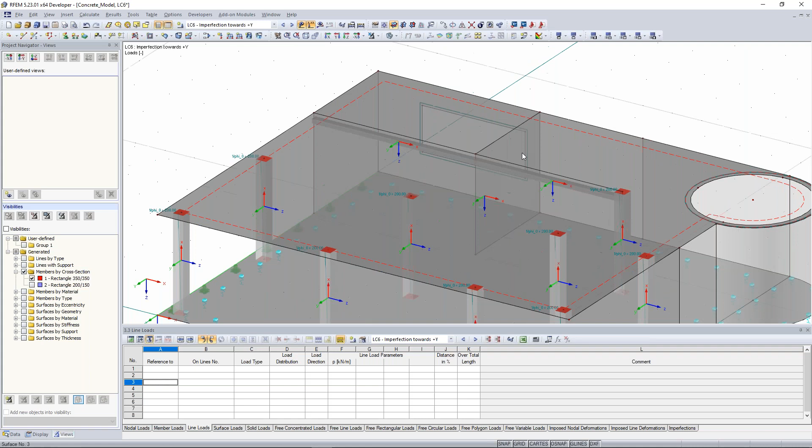And now I want to create an FE mesh refinement at that node, because sometimes the FE mesh should be modified in specific parts of the model, in critical areas such as corners of openings, or areas with single loads, because there can be singularities. And you want to avoid singularities as much as possible, because singularities are parts of a structure where you don't get good results.

For example, we make an FE mesh refinement here. Click on that node, right click, FE mesh refinement, and click new. We apply it to a node, circular. The radius should be 1.5 meters, and the inner and outer length of this FE mesh refinement should be 0.1 meter and 0.5 meter. Click on OK, click again on OK. Now you see this circle here.

To show the FE mesh, go to Calculate, click on Generate FE mesh. To see it better, switch to wireframe. You see the FE mesh generation. The normal target FE length is 0.5 meter, which we set in the general FE mesh settings. With the FE mesh refinement, the inner length is 0.1 meter, and it becomes bigger and bigger up to 0.5.

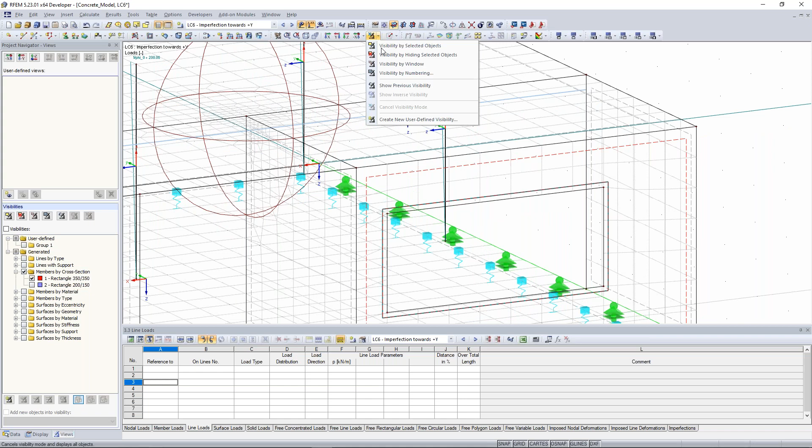It's up to you how to do that. For example, I learned that you need at least 4 FE elements here in order to have good results at this surface. So when you want to interpret internal forces or results, I don't know if 2 FE elements are enough to get good results.

It's up to you. So again, at the corners you will probably get singularities, because here you have just one FE element, and the results are calculated along one FE element. I don't know if you get good results here. So my recommendation would be to do some FE mesh refinements. Okay, good. I cancel the visibility mode.

Now everything is considered, in my opinion, and I can calculate the whole structure. I go to Calculate, and I choose the result combination, which is much faster than calculating every single load case and load combination. Click on OK, and the whole structure calculates.

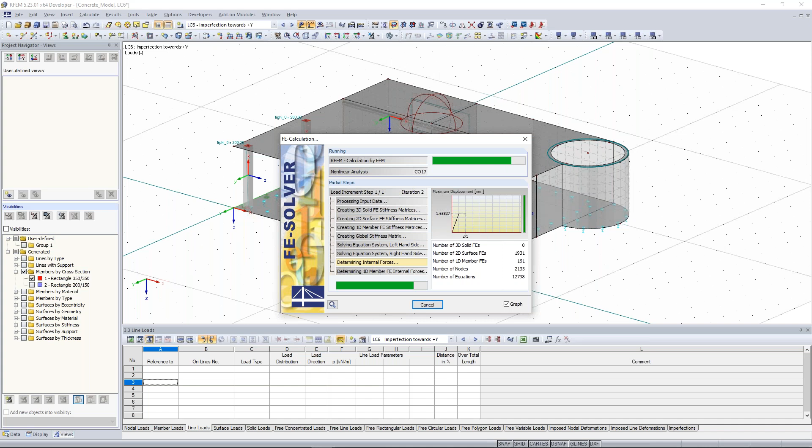Okay, now let's show the results. I jump to the result combination, click here on show results. And the first thing we see is the deformation. I think the deformation looks really nice, interesting. You have the possibility to see the deformation of the surfaces and also of the columns here.

You see now we have here this line deformation of these columns, of this member. Go to the display navigator, activate here deformation results, deformation cross-section colored, and you see here also the deformation of the cross sections. Okay, good. Next thing, members, the internal forces.

Let's go to the downstand beam and compare the results. Okay, these results look very good. So we have here field moments, also here this negative moment over this wall. I think by the plausibility check this is okay. Again, to the normal forces of the columns. Normal forces are pretty clear.

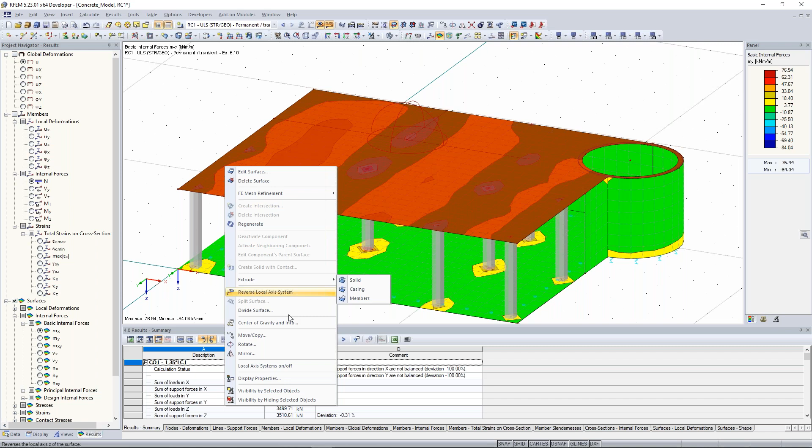And when I show the mx, basic internal forces, it is along the local x direction of this surface here. I think that's pretty clear. Here we have these bending moments. Here at the columns we have these negative moments. So I think that's pretty clear.

You can make a section. Go here, new section numerically, or create section through surface graphically. You can do that and then you can watch these results. I make it. I create this section here in the data navigator, scroll down to sections, right click, new section.

Give it a name of AA and choose the right nodes I want to have. In that case, I refer from one column to the other end column. The section on surface or the projection direction should be the global Z direction. And I refer just to that surface, not to the other surface, because the bending moments are a little bit different. Click on OK.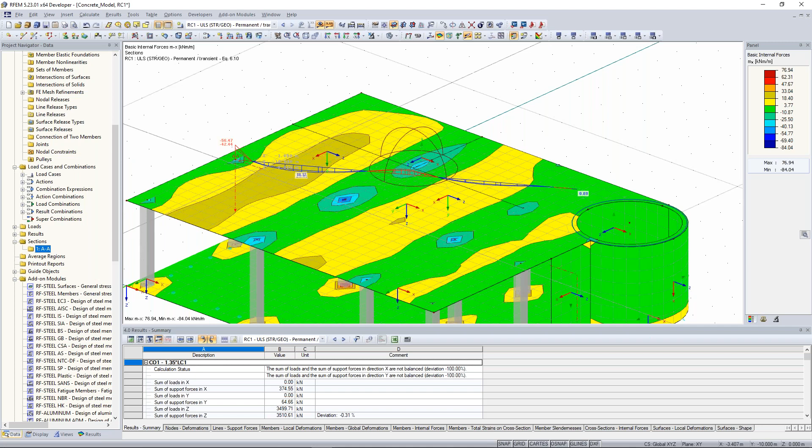Now this result diagram will be opened, but for this case it isn't so important, so I close this. When I want to look at the sections, you see here my section. And you see there was a mistake because the nodes of the section aren't right. So I edited this, set the section again right. Should be this kind. Now it should be right.

Okay. This will take some time. Okay, now I have the right nodes. And you see here the bending moment. Good. And also some other internal forces, my and so on.

Now, the next thing is maybe also important, the contact stresses. Contact stresses appear at the bottom surface, or soil stresses. Here we have these contact stresses, and especially at the areas where the columns are, we have very high contact stresses. I think that's pretty clear.

Also, you can show the support reactions. You will see here at the line supports this support reaction. When you want to have the distribution along the line supports, just go here to the display, go to results, support reactions, and say smooth distribution. And then you see here this distributed support reaction. Good.

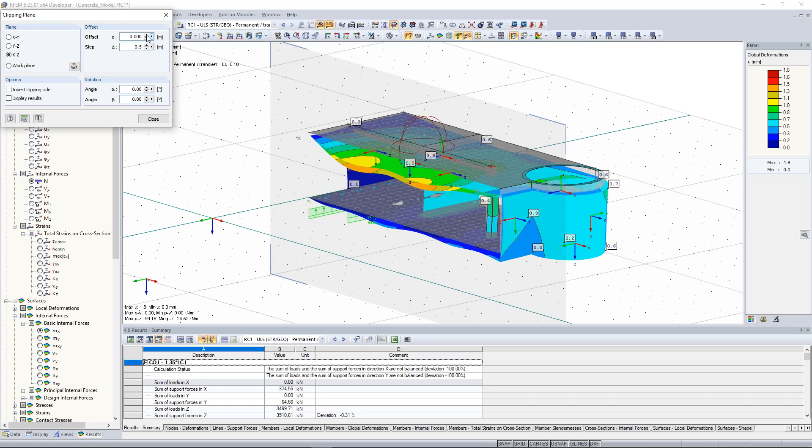Maybe two additional features. We have the possibility, very good for the interpretation of global deformation. When I activate the global deformation, first of all, the clipping tool: you can cut the plane, set a step of 0.5, for example, and then you can choose this offset, also choose the right plane, and so on. And then you see every time the different values there. It's very helpful.

You can also rotate the angle a little bit. It's up to you how to do that. Yeah. Okay, good. This is maybe a nice feature.

And one of my favorite features is when you want to impress someone, maybe your colleague next to you, and when you want to say, hey, look what I have for a nice structure, click the Shift button and the F button. And then it will activate the flying mode. Yeah. And you can fly around the whole structure or around the whole building.

So with the help of the arrow keys on your keyboard, you can fly around. With the help of your mouse, you can move your camera. And with the help of the up and down keys on your keyboard, you can jump to the next level and so on. If you want to increase the speed of this flying mode, just click on the plus and minus keys on the keyboard and it becomes faster. Yeah, so much to that.

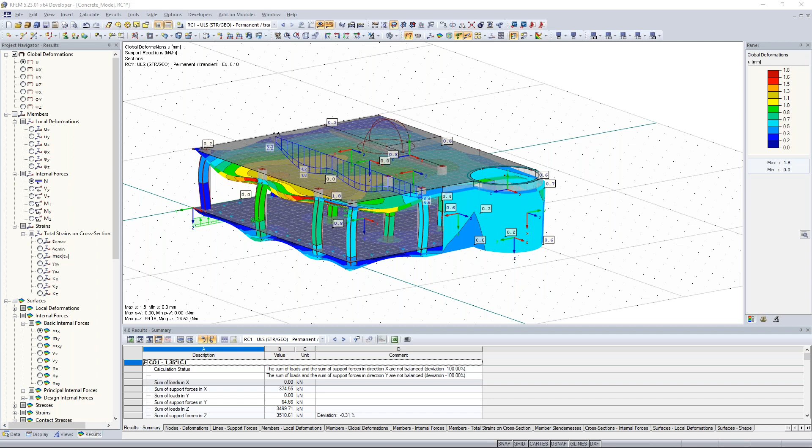Could you show how to set a local coordinate system? Again, could you read it again? Could you show how to set a local coordinate system? Of course, that's no problem. In order to set a local coordinate system, you can right click, open the context menu, and go to coordinate system. And there you have the possibility to create a new user-defined coordinate system.

And when I want to refer, maybe now to that level here, from another level. So from that level here, okay? I can say, look to these points here, U, V, W, and I can say my origin point should be please this node here. My u-axis, you see it here, should be please this node.

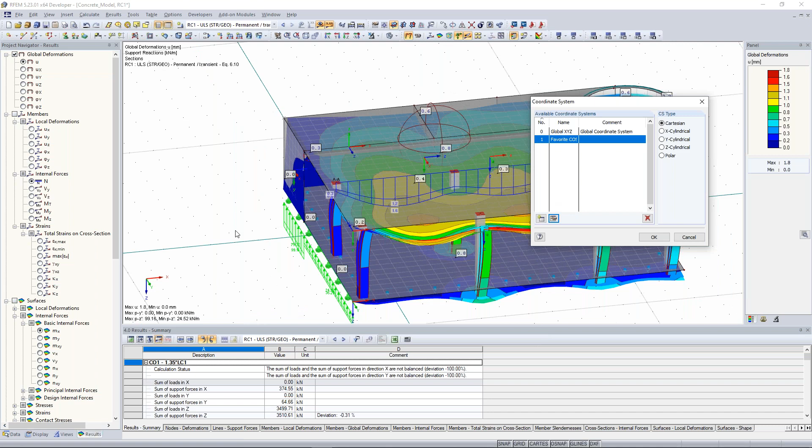And my other node should be please this one. So I created this plane here. Click on OK. Now you can enter a name, so favorite coordinate system. Click on OK. Click on OK. And now you see here this user-defined coordinate system. Maybe I deactivate the other coordinates. Okay. This is the way how you can create a new user-defined coordinate system.

Okay, next question, please. Is there an add-on to RFEM to design and calculate different ground types? What are ground types? I don't quite understand the question either. Which time? 11:24. Okay, wait a moment. Different ground type. What do you mean exactly by ground type? Could you tell us this question again? During that, I would continue with other questions.

Another question is, what do you mean by imperfection in load cases? So we have the load case imperfection, and just the load case imperfection wouldn't cause any internal forces. But in combination with some other loads, the imperfection would cause additional internal forces. So you have to consider these imperfections every time in load combinations. Yeah. Okay, next question maybe.

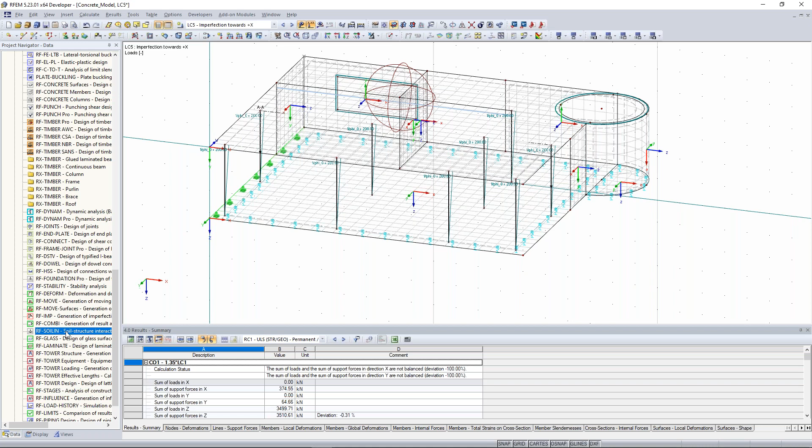In my opinion, there are different calculation methods concerning the right ground analysis. So consider the ground is a philosophy topic for itself. There are different ways to do that, different methods. Yeah, there are different ways to consider that.

Good. Next question. Okay, that's a long one. While discussing the result options in the internal forces, you said mx is mentioned with respect to local axis, but in the model we have x-axis oriented differently with respect to different surfaces. How to interpret this result? This question is at 11:59, Daniel.

Okay. Wait a moment, I go back to my right work plane. So you have to distinguish between the local axis of this surface and the global coordinate system. And the results of these surfaces refer every time to the local axis of the surface.

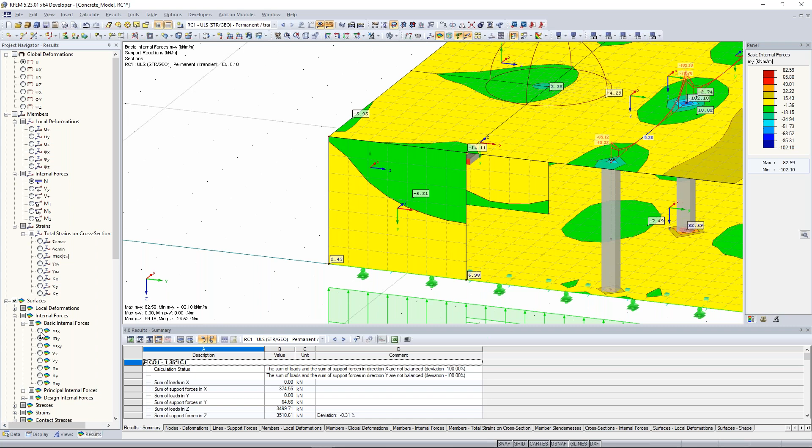So when we look maybe to one of the walls here, mx and my, I think that's pretty clear that we don't have so much bending moments there. But when you look to ny, there we have now some normal forces in that wall. So please keep that in mind. These basic internal forces mx and my refer every time to the local axis of the surface.

Okay. Next question. Give me a second. Okay, how do you consider eccentricity of loads, for example, in column members? That's a really, really good question. I have to think about it, because I think that's possible because we implemented this function, but I have to look up how to create this.

Maybe Praxitelis, could you look for it? I can look it up and send the link maybe. Yeah, that would be fine. Now I think I have it. Wait a moment. Yeah, okay. Look, now I have it.

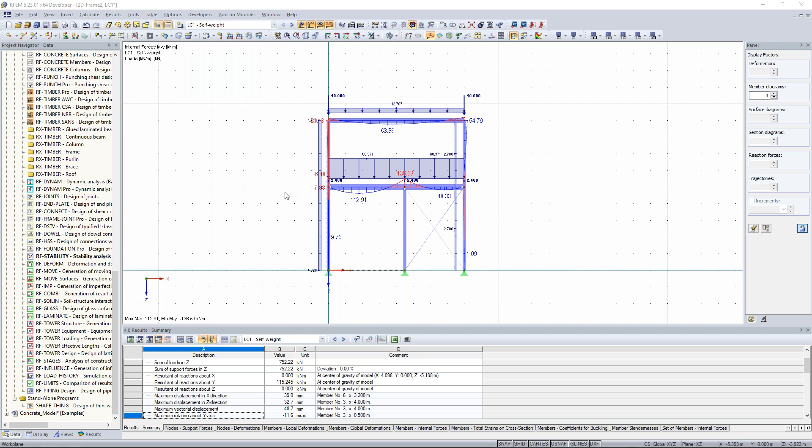Is it possible to have cross-section trapezoidal shape in bottom floor? Yeah, you have the possibility to create different cross sections, of course. When you want to create this cross section, use this cross section library. There you will find a lot of cross sections, also some trapezoidal cross sections, like this one here, trapezoidal hollow section. This is possible.

Now I think I know what you mean. Yeah, of course, this is possible here, trapezoidal hollow section, in order to have this as a downstand beam. Yeah, that's possible. So you want to create maybe a composite structure. Yeah, this is possible, of course.

So you find it here, cross-section library, trapezoidal cross-section, hollow rib section, or also here, trapezoidal hollow section. Yeah, that is possible. Next question.

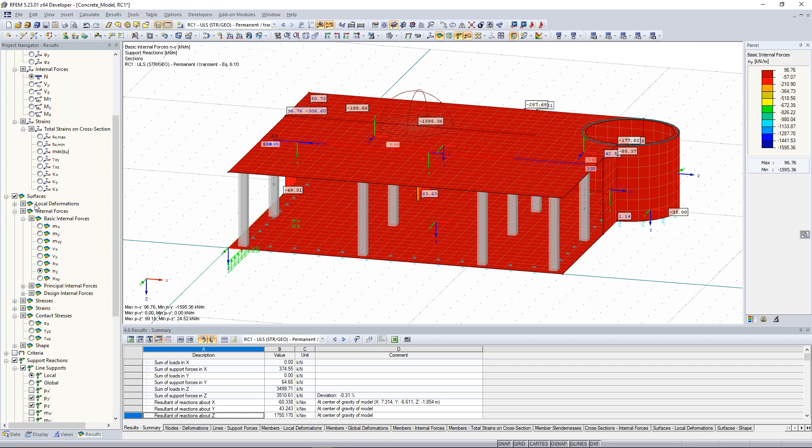Are you going to consider the issue of punching shear between the column and the slab surface? Yeah, of course, you have to consider these things. You can see the values here. So when I look to the results, go to the basic internal forces. I think that's pretty clear.

And when you want to design this in consideration of the punching shear, you can use one of our add-on modules, and this is RF-PUNCH Pro. There you consider the punching shear design of surfaces and consider these forces within these columns here. Maybe design internal forces would be, yeah. But you have to activate or use this RF-PUNCH Pro add-on.

Good. Next question. The next is if you could show some options related to documentation of results. Yeah, of course. But this will take a little bit longer. So when I want to transfer some results or some information about the whole structure, you can create a printout report. Click here on print graphic. Please use this mass print. This is very helpful for creating several documents and pictures. Click here on mass print settings.

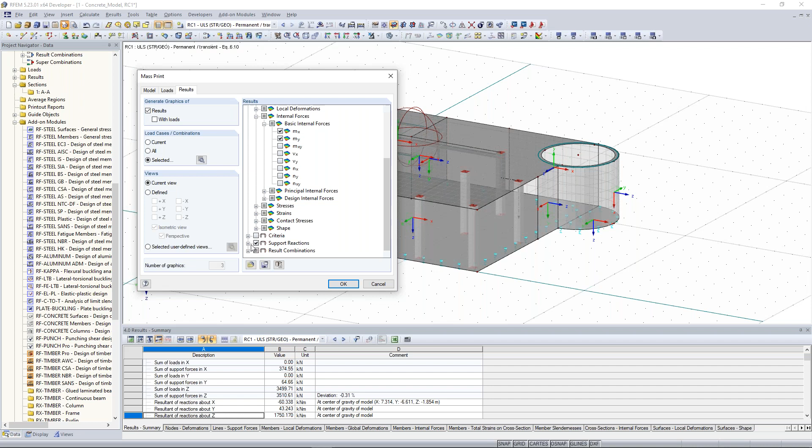Now I have to choose the results I want to show. In that case, I'm interested in the global deformation maybe, and basic internal forces, and maybe also the reactions, and maybe also the contact stresses at the bottom plate. I refer to my current view, click on OK, again on OK. Then I click on OK, and then the printout report will be opened.

Now I have there on the left side this printout report navigator, a big overview about the model information, and here also the generated model. When you don't like this image, just right click, say edit, and change that. In that case, I don't want to see the FE mesh refinement, so I deactivate it, and I deactivate also the FE mesh. And then I can say okay, go back. And now you have it here like that.

When you go to the chapter of loads, you see here the different images of the loading and their load cases. Takes some time. Yeah, very helpful. Here again, the wind and also the different results we created. Okay, good. This is maybe one way to do a printout report. Next question maybe.

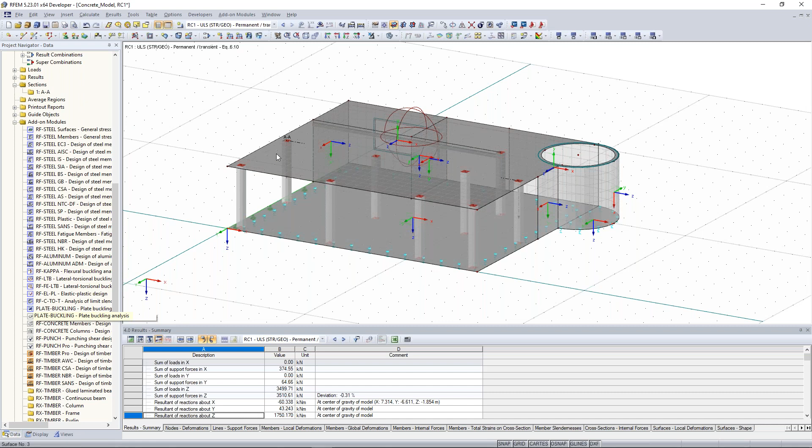Does RF-STABILITY also take into consideration reinforcement layouts if one uses this tool for RC structures? It's a good question. It's a really good question. Because normally, in order to calculate concrete structures with the reinforcements, you get a stiffer cross-section, stiffer surfaces, and so on. You have to use one of our add-on modules. For surfaces, please use RF-CONCRETE Surfaces. For members, please use CONCRETE Members and also CONCRETE Columns.

And normally, RF-STABILITY should consider these cross-section properties, especially the stiffness, also of the reinforced column, for example. This should normally be possible. But in my opinion, I don't think it makes a big difference when you have a little bit stiffer structure. But when you want to consider concrete design or reinforcements, you have to use one of our add-on modules. So click here on RF-CONCRETE Surfaces or CONCRETE Members in order to design these members and consider reinforcements in the column, for example.

And then you can do again an RF-STABILITY analysis in order to get your critical load factors and see where the critical points of the whole structure are. And I think this is also good for the last question. The last question is how to see reinforcement details. So for that, I click here on the surface. For example, I click here, RF-CONCRETE Surfaces.

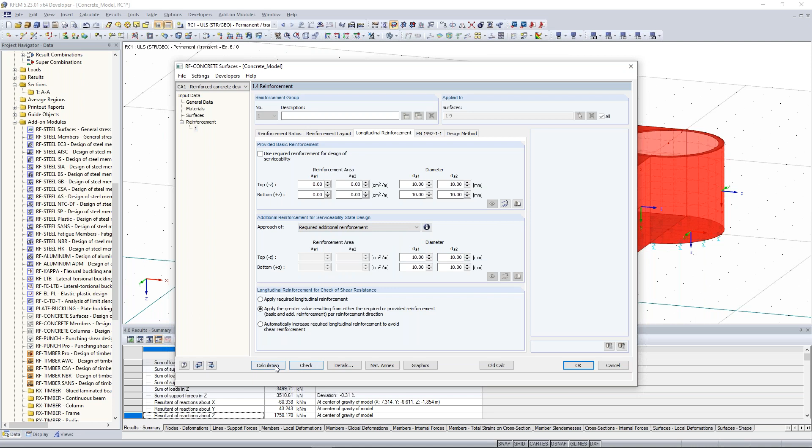Here I can set the reinforcement ratios, the reinforcement layout, and a lot of other things. Then you can calculate it. Also you can use the diameter and so many other things. Then you can calculate it, and you will see the different results. I don't know if it's right or not.

But you see it calculates a long time, so I cancel this. But here you can preset everything.

For that, I would recommend you look at our webinars concerning concrete design. We also offer some online trainings concerning this concrete design. So, I think that is everything for now. Or is there any question?

No, just one last one. Are we planning other webinars like this for other products of Dlubal, like RSTAB or some special design tools?

Yes, we offer other free webinars. Me and Praxitelis are especially responsible for the basics of RFEM and RSTAB. I can do some steel design, and that's possible. I can also do some concrete design, but for that we have other employees who are specialists in those areas. So I would recommend you look at our online trainings and webinars.